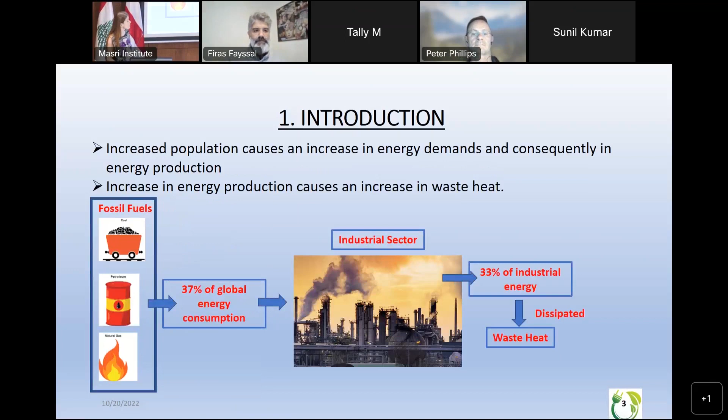As we all know, energy demands worldwide are increasing, and with that increase we have an increase in waste heat. Actually, 37% of global energy consumption goes to the industrial sector, and 33% of industrial energy is dissipated as waste heat, which is a huge number. On the other hand, the residential sector is responsible for consuming about 40% of global energy, and heating and cooling alone compose 40% of residential sector consumption, which is also a huge number.

In our study, we use the Mobilized Thermal Energy Storage System, abbreviated M-TES, to both valorize waste heat and reduce residential sector consumption by covering heating, cooling load, and water heating.

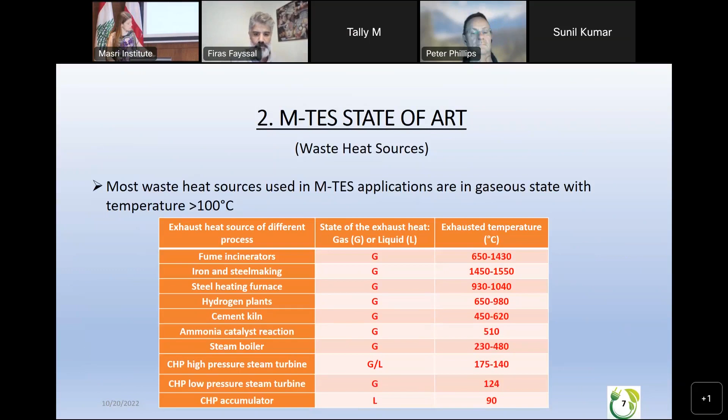A quick state of the art of M-TES systems starts with waste heat sources. In most applications, the waste heat sources are in gaseous state with temperature higher than 100 degrees Celsius. Most used phase change materials are sugar alcohols and salt hydrates. Erythritol is the most used phase change material, which will be used in my study. It has the highest energy density, a high latent heat, and is relatively cheap.

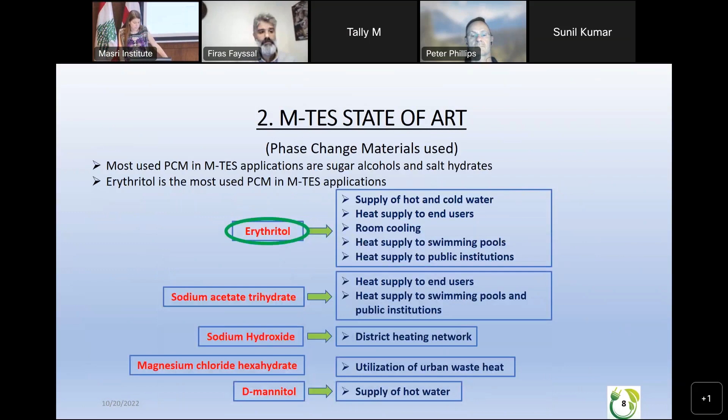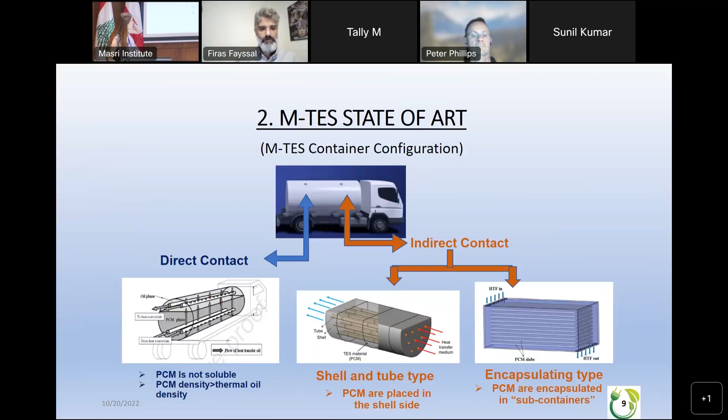The container configuration could be direct, where the heat transfer fluid and the phase change material are mixed directly—the phase change material density is higher than that of thermal oil to ensure phase separation—or indirect contact, such as the tube and shell type, where the PCM is placed in the shell and heat transfer fluid flows inside the tube, or the encapsulated type, where the phase change material is encapsulated in subcontainers and the heat transfer fluid flows around.

The objectives of our study include a large scale PCM capacity, or M-TES system capacity, of about 7 megawatt hours. Our case study is a Lebanese case study. In this study we designed the different heat exchangers of the system and conducted a simulation for the different phases.

We study the effect of heat transfer fluid flow and waste heat potential on the charging time and efficiency, and we calculate the system efficiency and its effect on the power plant. Finally, we have an economical and environmental evaluation of the system.

For our case study, as we know Lebanon is one of the countries that has a shortage in electricity, and we have a high rise in fossil fuel costs, with benefit in lowering our dependence on fossil fuels. That's why we chose Lebanon for our case study. In our case study, the waste heat will be the fumes of a Lebanese power plant.

The end user will be the Lebanese University main campus in Hadath. We choose erythritol as the phase change material, or storage material. The container will charge in the Lebanese power plant and discharge in Hadath, then return after discharging to the Lebanese power plant to start a new cycle.

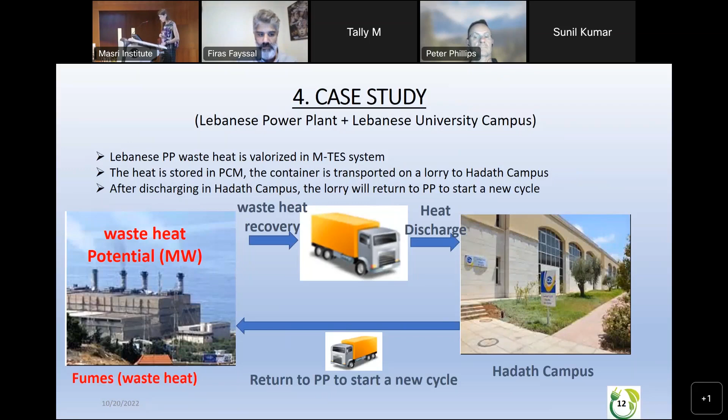The M-TES cycle is abbreviated and shown in this figure. We have the recovery heat exchanger where the fumes transfer heat to the heat transfer fluid. The heat transfer fluid in its turn transfers heat to the PCM in the storage heat exchanger.

The container will be transported to Hadath where it will have self-discharging due to natural and forced convection. In Hadath, the heat transfer fluid will take heat from the phase change material and restitute heat to the circulating water system. The circulating water system will pass through absorption chillers to produce cooling, or through heating radiators to produce heating, or through a domestic hot water heat exchanger to produce sanitary hot water.

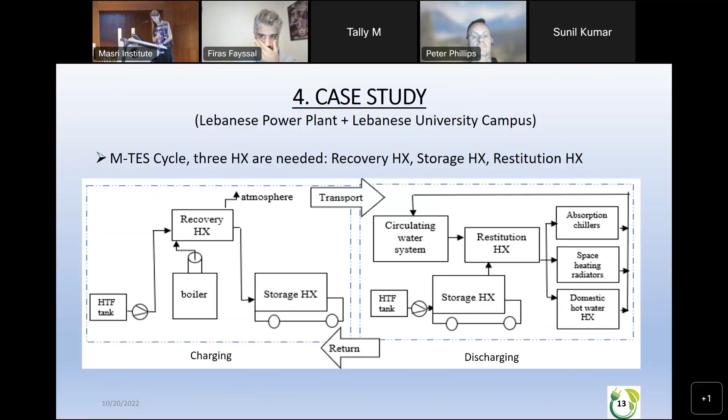The waste heat potential is represented in this chart. It is a typical year chart on an hourly basis. The mean potential of the fumes is about 10.4 megawatts. The maximum is about 21.4 megawatts, and the minimum is about 0.8.

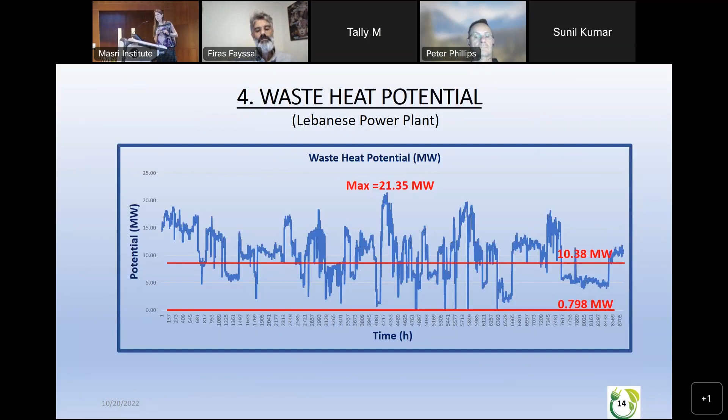The average waste heat temperature is about 150 degrees. During the year, the energy wasted is about 91,000 megawatt hours. The load profile was estimated based on the different faculties, areas, and dorms. The load consumption during the same typical year is about 19,000 megawatt hours per year.

For the heat exchangers, we use the log mean temperature difference method and the NTU method to calculate the heat exchanger areas and efficiency. The recovery heat exchanger and the restitution heat exchanger are both counterflow tubular heat exchangers.

In the recovery heat exchanger, the shell is the chimney with a nominal diameter of about 2.2 meters, and the tube where the heat transfer fluid flows is about 10 centimeters in diameter.

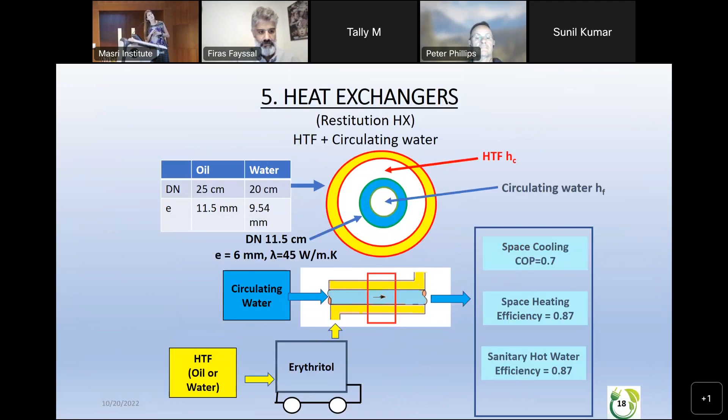The restitution heat exchanger is also counterflow tubular. The nominal diameter of the shell, where the heat transfer fluid passes, is about 25 centimeters, and the nominal diameter of the circulating water tube is about 11.5 centimeters.

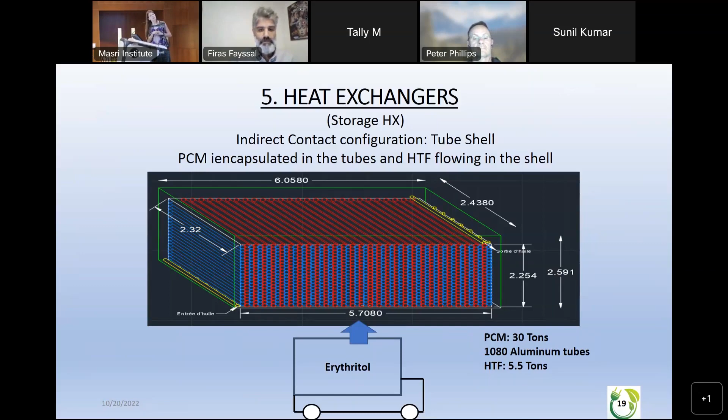The storage heat exchanger is inside a 20-foot ISO container. I chose to encapsulate the phase change material in about 1,080 aluminum tubes, with a total PCM mass of about 30 tons. The heat transfer fluid enters from below and exits from above. We have about 5.5 tons of heat transfer fluid flowing around.

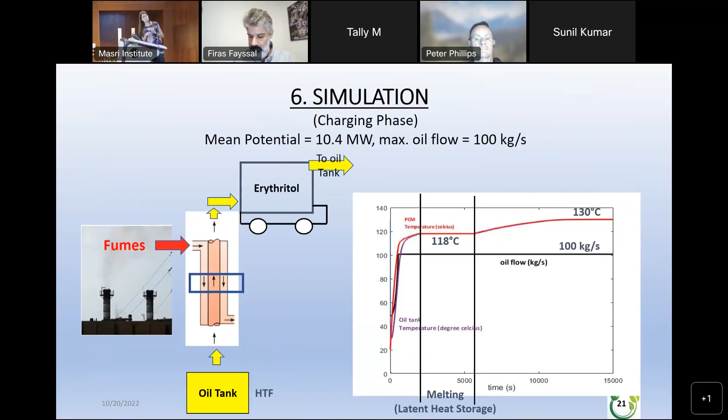After complete melting, the PCM stores sensible heat until reaching 130 degrees Celsius. The mass flow and oil tank temperature increase with the increase of phase change material temperature until reaching the oil flow set point. This is the charging phase.

In the charging phase, two important factors are the mass flow set point, or maximum heat transfer fluid, and the waste heat potential. By increasing the heat transfer fluid flow to double its value, about 200 kilograms per second, we ran the simulation and got an increase in charging efficiency by 8%, and a decrease in charging time by about 29%. It's an important parameter in the LTES system.

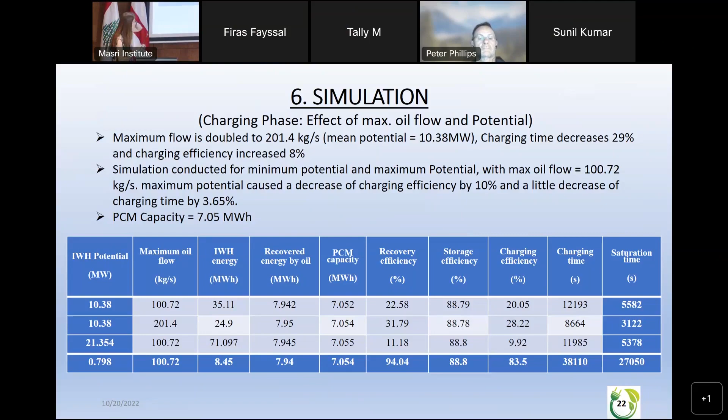The simulation was repeated for higher waste heat potential. We conclude that we have a slight decrease in charging time by about 3.65%, and a decrease in charging efficiency by 10%. In this table we have the different results of our simulation. We can see that our charging efficiency ranges between 9.9 and 83.5.

For self-discharging, as mentioned before, during transportation we have natural convection or forced convection, and of course a convection factor. The temperature of the MTS system decreased to about 129 degrees Celsius. We repeated the simulation for different rock wool thicknesses, which is the isolation material, and found that 4 centimeters of rock wool is enough for our case.

For the restitution heat exchanger, we can recognize three powers. We have the useful power, which is the cooling power, heating power, or sanitary hot water power.

We have the restitution power, which is the useful power over the efficiency of the systems used, such as the absorption chiller, radiator, or heat exchanger for hot water. And we have the discharge power of the PCM, which is equal to the restitution power over the efficiency of the heat exchanger.

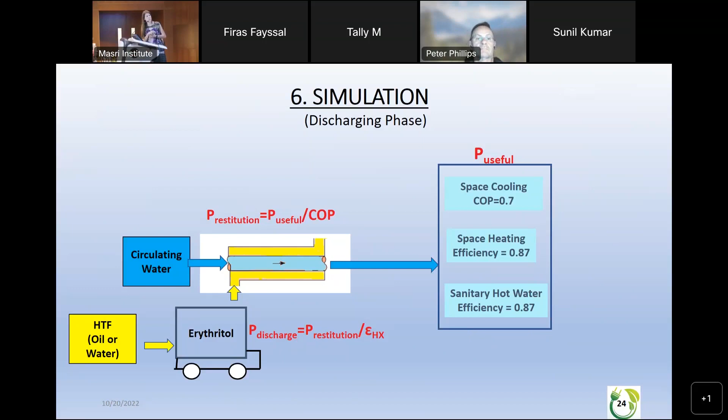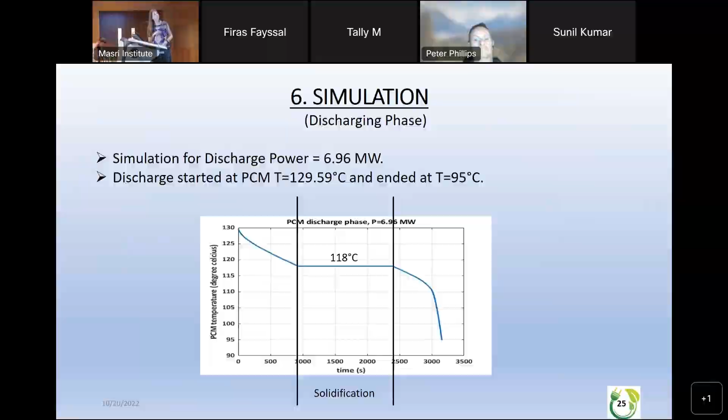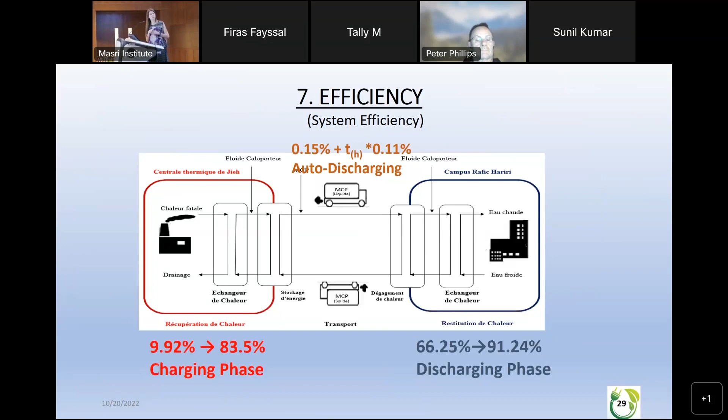The efficiency of the different stages of the system is represented here. In the charging phase, as mentioned before, the efficiency ranges between 9.92 and 83.5. During transportation it's 0.15%, and every additional hour causes a decrease in efficiency of 0.11. In the discharging phase, the efficiency ranges between 66.25 and 91.24. The efficiency of the power plant without using the MTS system is about 30.21%.

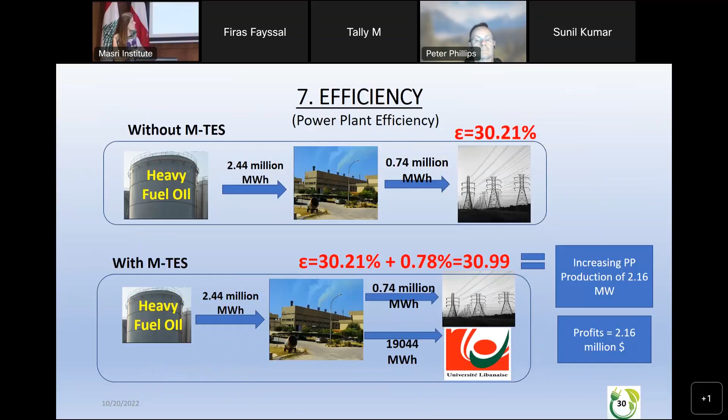With the use of M-TES, the efficiency increases by about 0.78%, which is equivalent to producing about 2.16 megawatts. The profits from this efficiency increase are about 2.16 million USD.

Economic and environmental assessment: the economic assessment was conducted for two cases. The first case is for heating only, and the second case is for heating and cooling. In the first case, the payback period is about 3 years, 10 months.

The net present value is 2.7 million USD, and the cost of heating, which is the most important result we get, is 0.02 USD per kilowatt hour.

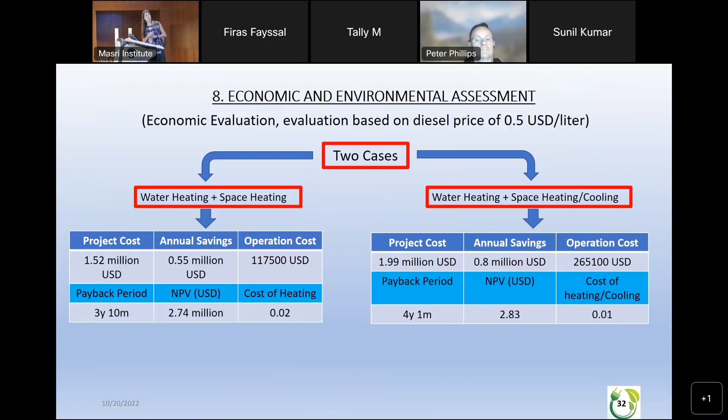By using the M-TES system for both heating and cooling, the payback period increases a little bit, to about 4 years, 1 month. The net present value is 2.83 million USD, and the cost of heating and cooling is 0.01 USD per kilowatt hour.

Diesel savings in the Lebanese University campus: they use fired boilers for heating and for sanitary water heating also. The savings from diesel is about 1.09 million liters per year.

Since the M-TES system will be transported, we have diesel consumption for trucks or lorries, about 140,000 liters. By subtracting the two numbers, we get a total saving of about 0.95 million liters of diesel per year.

Environmental assessment: the electricity savings is about 2,938 megawatt hours, because in the campus they run electrical chillers, not absorption chillers, so the savings from electricity is about 2,900 megawatt hours per year. The diesel savings, as mentioned in the previous slide, is 0.95 million liters. So the total CO2 reduced is about 3,400 tons of CO2 per year from our system.

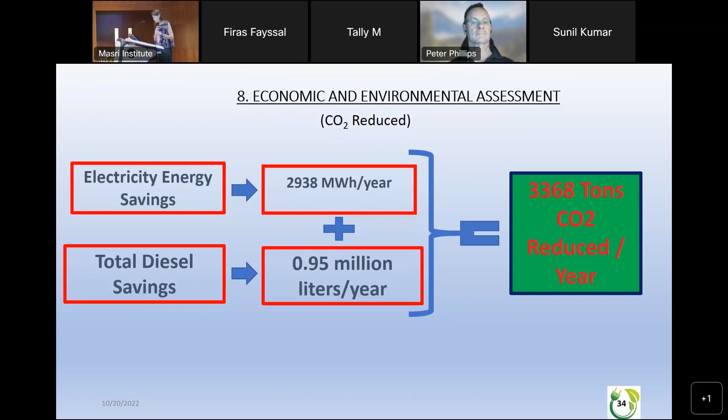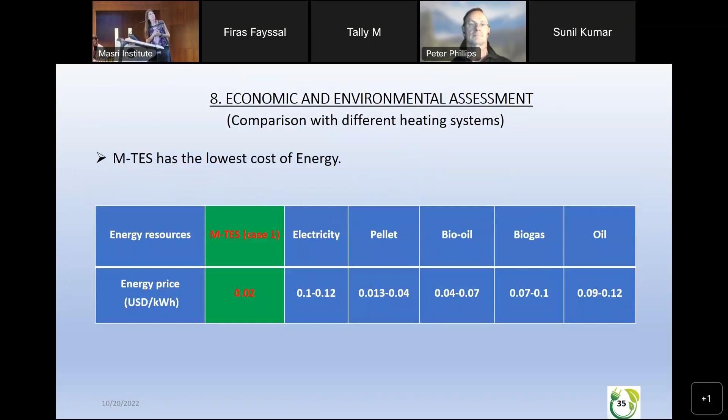By comparing the M-TES system with different conventional heating systems, we can see that the M-TES system has the lowest cost of heating, about 0.02 USD per kilowatt hour, among the other heating systems.

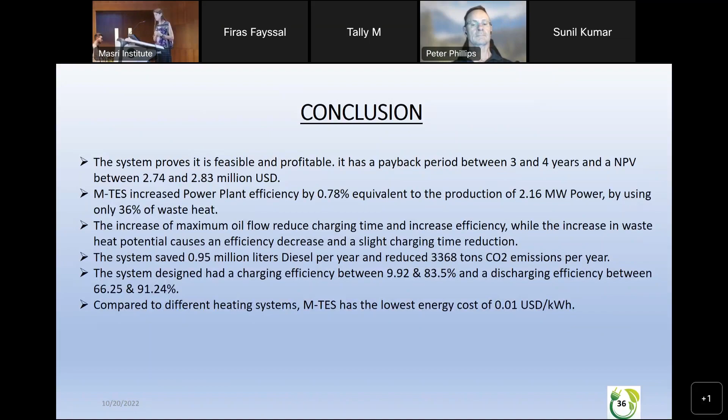As a conclusion, we conclude that our system is feasible and profitable. We increase the efficiency of the power plant by about 0.78%. The different efficiencies are set, and we have a saving of 0.95 million liters of diesel. The most important parameter is the maximum oil flow. Finally, compared to different heating systems, M-TES has the lowest energy cost of 0.01 USD per kilowatt hour.